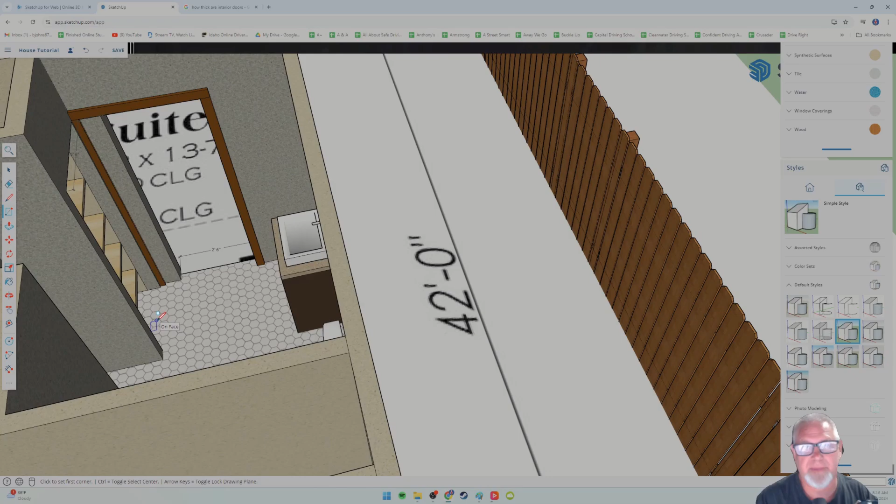I'm having some issues, some challenges, some successes, and that's the whole nature of the beast here. I made an error earlier on a previous video, which I may update with some text or something.

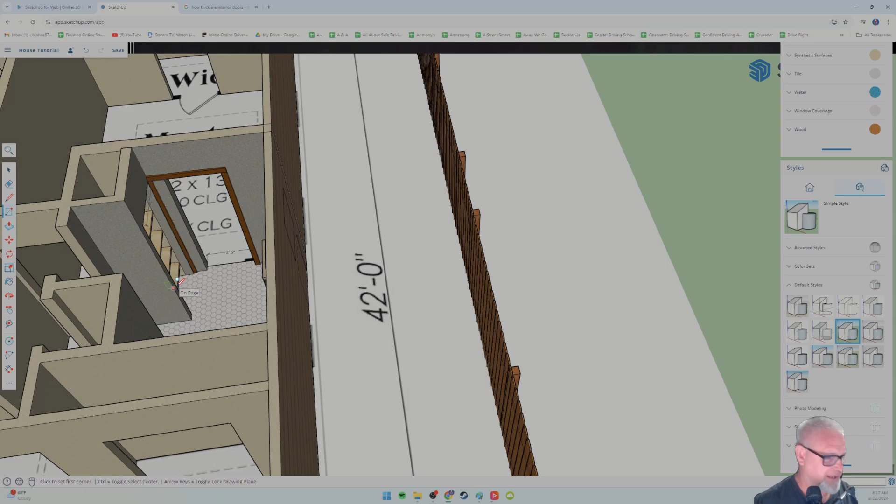3-foot doors are considered handicapped accessible. My house was built that way for a previous owner, so I kind of forget sometimes that the normal house has 2.5-foot doorways. That's normal, that's probably what your doors are. The outside doors are 3 feet, which allows you to get furniture in. But the problem is once you get the furniture in, then you have 2.5-foot doorways. I always thought that was crazy.

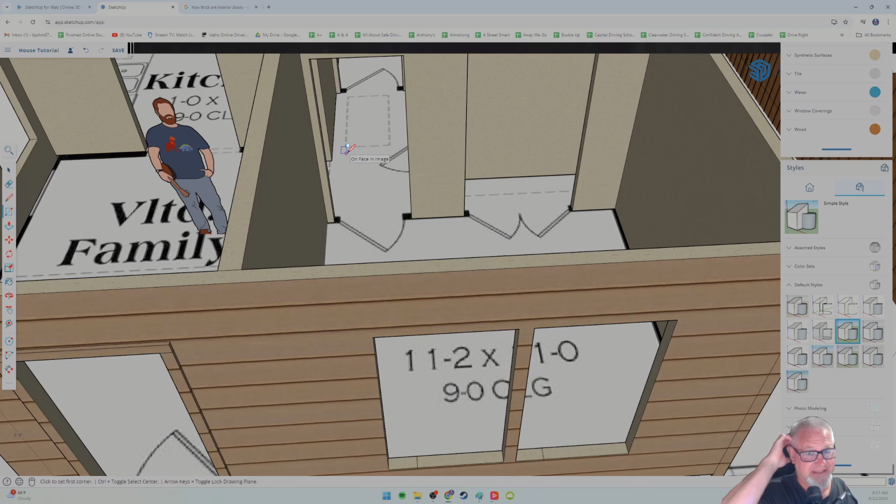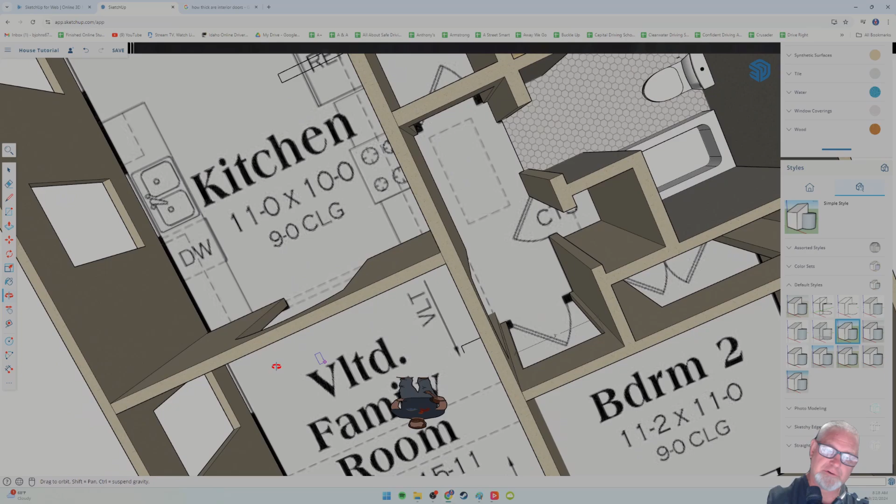So outside, now this is obviously not a requirement, but your outside door should be 3 feet. Inside doors, I've already told you 3 feet. If you have room, great. I'm going to keep my arches at 3 feet because I think that's cool. I could even make them wider, which I think would be cool. Between the kitchen, depends on how much counter space and stuff I need inside there, but a nice bigger arch in here would be really cool. And it's pretty easy to do just by pushing.

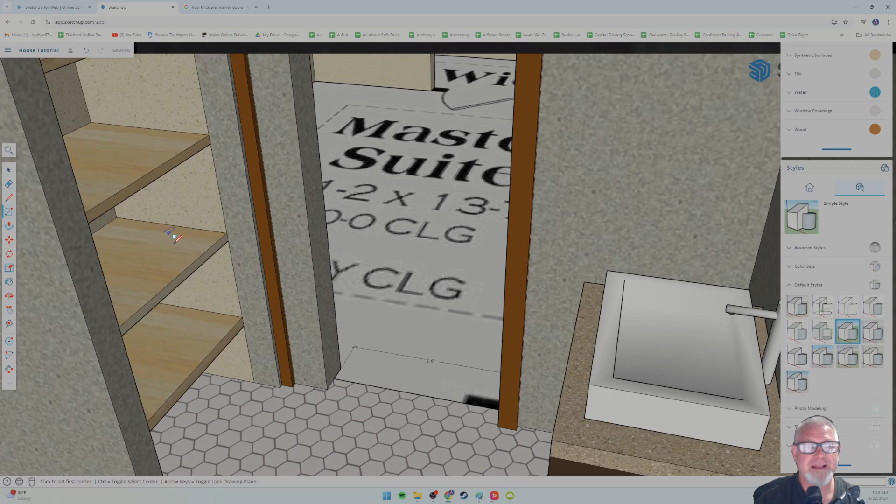So I'm going to jump back into the bathroom as my example because that's the only room that I have pretty much almost done. You do not have to do this. I added some shelving, and I'll be full disclosure, I didn't measure these shelves, didn't measure how far apart they are. I just eyeballed it. So that's not normal for me, but I just didn't want to spend the time, it's just a minor little detail, but I think it does look cool.

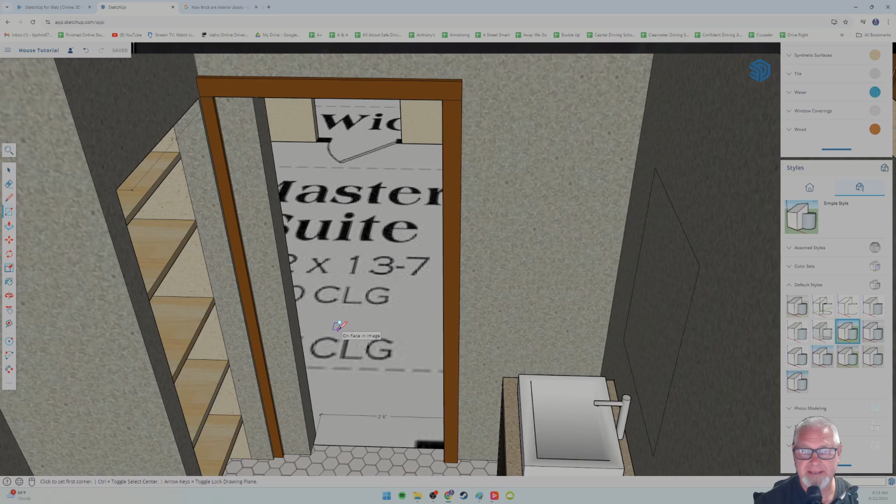And then I realized I don't have room for 3-foot doors in this very small house, so my doors barely fit. I could have moved the whole door over, but I was running into some issues here with the molding. And so that's what this episode is for: windows, doors, and molding. One of the most important things to make your house look cool.

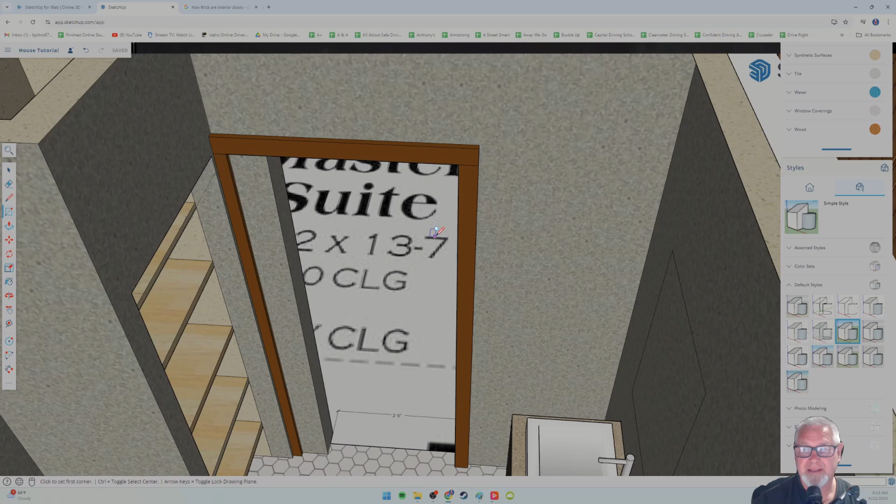So the molding on the inside, these are 1 inch deep by 2 inches wide. Now that's pretty skinny, but this is a small house. Normally I'd go 3 inches, maybe even 4 inches on a nice molding, but this is kind of like a tiny house, so I'm shrinking everything.

Including my doorways. So I have already measured and pulled this wall in, so I have a 2.5-foot doorway, which is great. I just need to fix the molding so it fits.

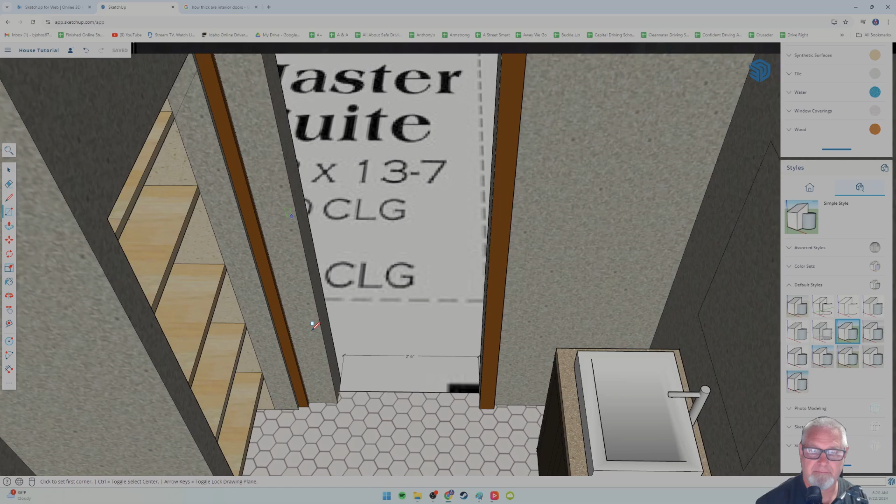On right here. So the way I do that, by the way, is typically I'll just go to the floor, and this is Mr. Johns' tip. I'm going to go out 1 inch, and then I'm going to go over 2 inches. I'm going to go in just to the wall and kind of connect it into a shape, and then click it to make sure it's a separate shape.

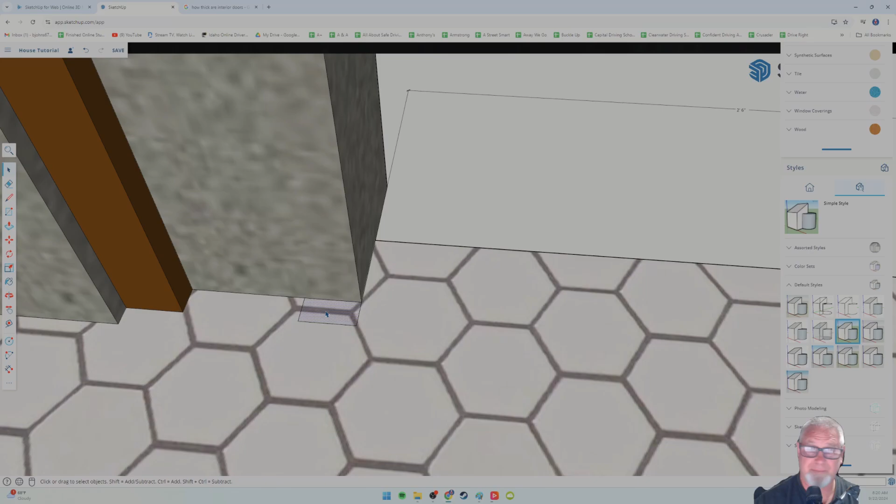For some reason, mine is not filling in anymore, I don't know what I did. I'm not on X-ray mode, but it's not filling in solid to show me that it's a shape. That's not good. But once I know it's a shape, I can just pull it up. And yes, it does take the texture, the paint, the color of the floor, whatever I cut it out of, that's fine.

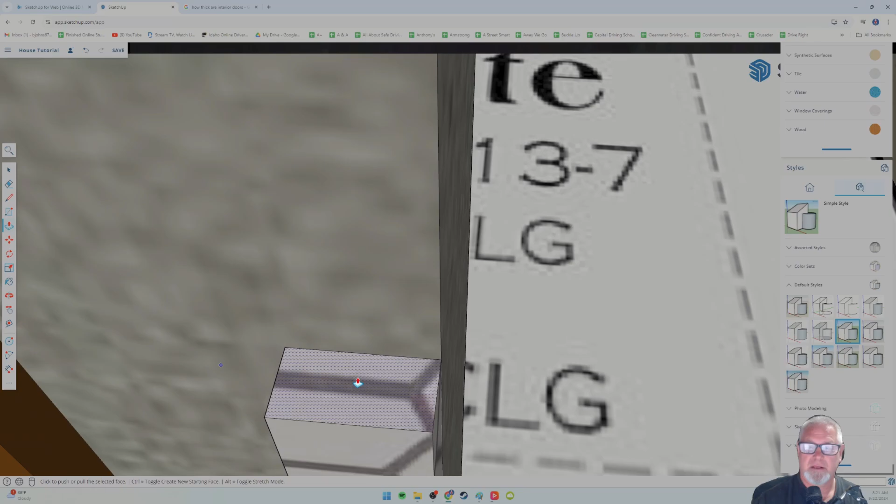So now I am just kind of panning and pulling. I mean, I could measure probably and do it, but I don't want to take the time to do that. So I'm just going to snap it up here. I mean, I could zoom out and probably do it a lot faster in one swift motion and just go until it doesn't go anymore, and that pretty much locks it in place.

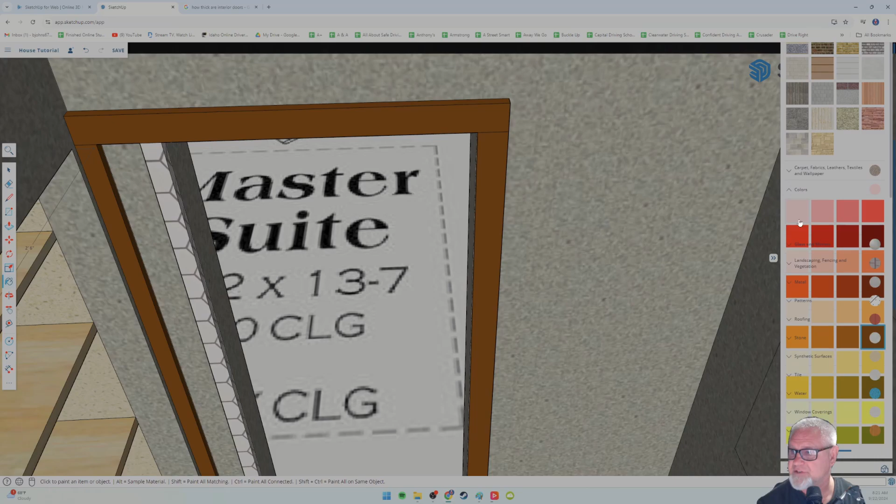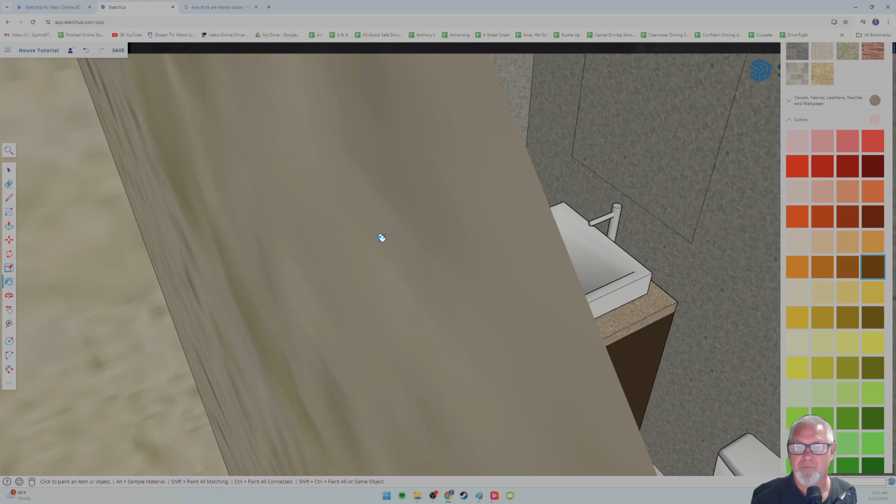And then I have played around with different colors for this, that's not what I want to do. I want paintbrush, so paint bucket, and color. I was using the darkest brown I could find right there. I tried to match the color of the cabinet, but I couldn't find a dark enough color, so I don't think any of these really work. Let me try that one. No, it's worse. I wish there was a dropper tool so you could match a color, that would be a great upgrade. I tried white, then I went brown, so it doesn't matter, you could paint it purple, I don't really care. But your molding has to be painted a color or texture or whatever.

So, and it needs to be colored, here I can see that side right there, it's not colored either. So now, why does that look, did I do 3-inch trim in here? Oh, I did do 3-inch trim.

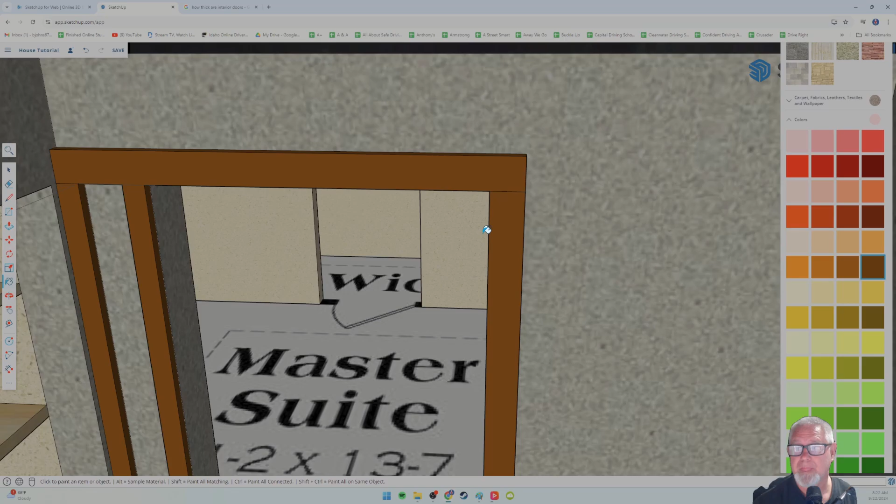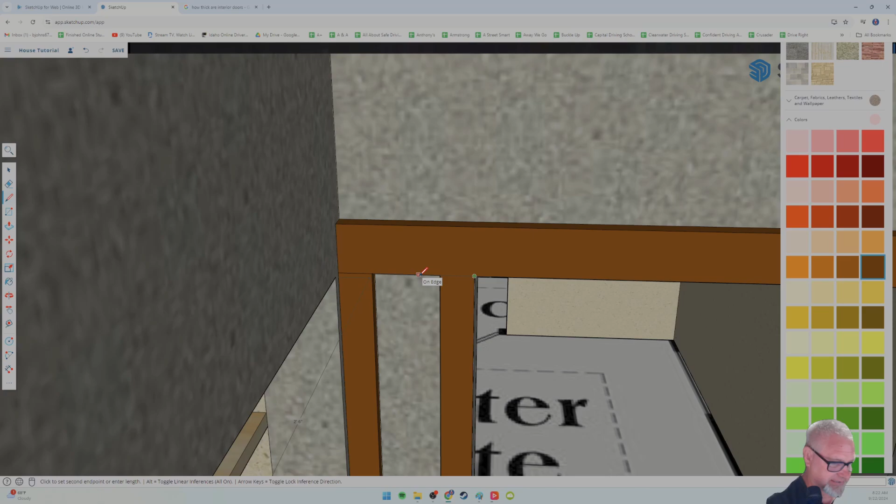Okay, I guess I decided the 2-inch trim looked too cheap, so I went with 3-inch. I forgot, so I need to make this wider. Here's what I'm going to do: I'll click from here over and type in 3 inches. I'm actually happier with that, 3 inches, and go straight up.

Now that's where I need to— the walls are just in the way constantly in here. Seriously, tight quarters, be careful how much you zoom in. I'm just trying to get to that, so delicate, just be delicate and don't get frustrated.

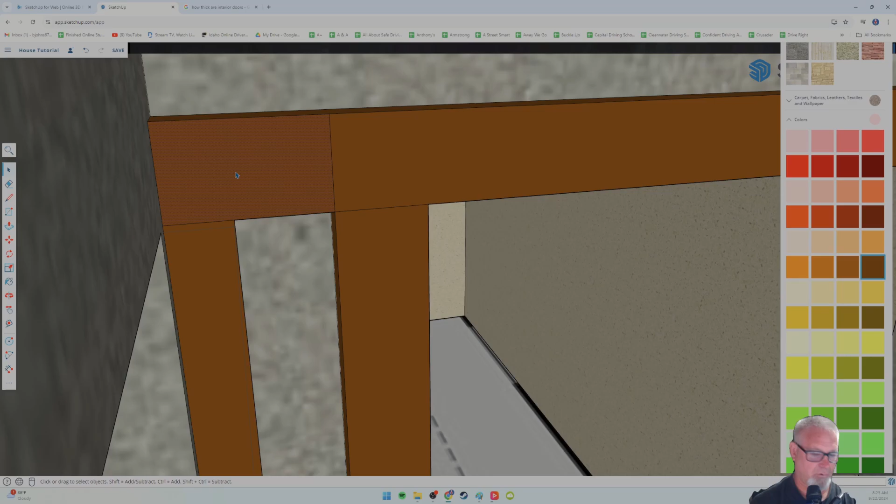I'm going to go over until it snaps to that line. Now I'm 3 inches. Now I can also delete this old one. Might take me a second, because now you don't have to do this. Obviously, I'm just fixing this.

Okay, you get my point, I think. So, did I delete part of the wall? I did. Don't delete the wall. Just make sure you know what you're selecting.

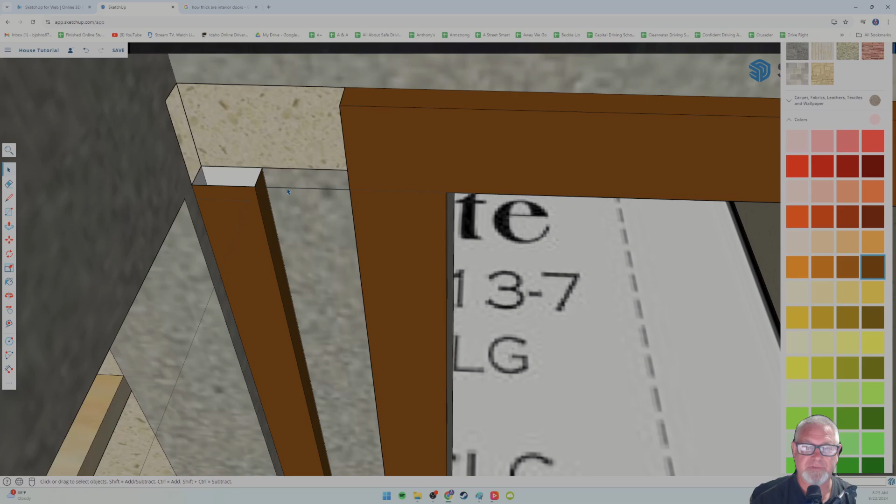So, okay, I don't really need to do this on video. You get the point—I wanted to show you how to make your trim, so there's a nice piece of trim around the doorway. I normally make bigger houses; this is my first small house. I've done a tiny house, but that was— seriously, where am I?

Yeah, I'm going to have to just change your view, go up, zoom out. What I'm doing is zooming out, just getting unstuck.

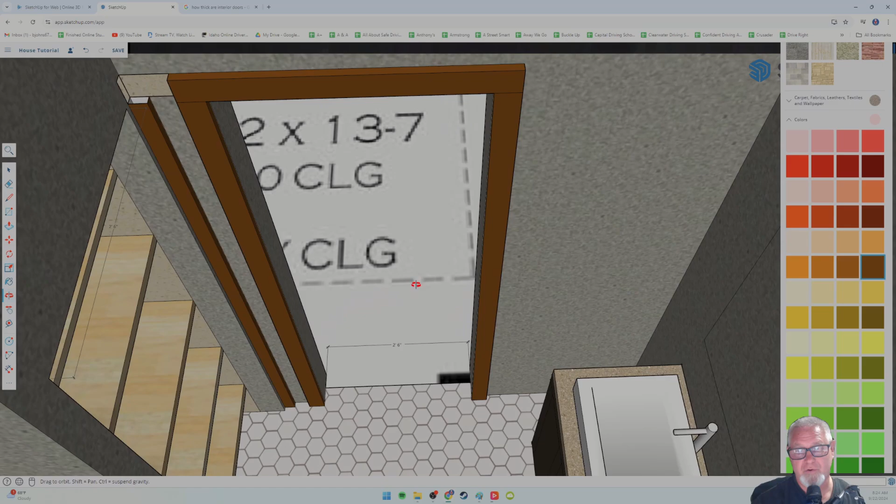So what I want to show you is a door. How would Mr. Johns do a door? I could download it and scale it—that's true. There's a lot of doors in this house, so you could, but I'm going to try it this way first and then make a decision.

Doorway should be right in the middle. So what I'm going to do is, let's see, the best way to do this—I'm just going to click and drag and type in 1 3/8. 1 3/8 inches. Let's see if it takes that.

I think it— no, it didn't know what I was talking about. You can see why I like millimeters so much better. 1 3/8— if I just type in 1 inch, no, it's not going to know that. How do I type in 1 3/8 of an inch? Well, that's the— okay, I know there's a way, come on now. Let's just make it easy and type in 2 inches. Got to figure that out.

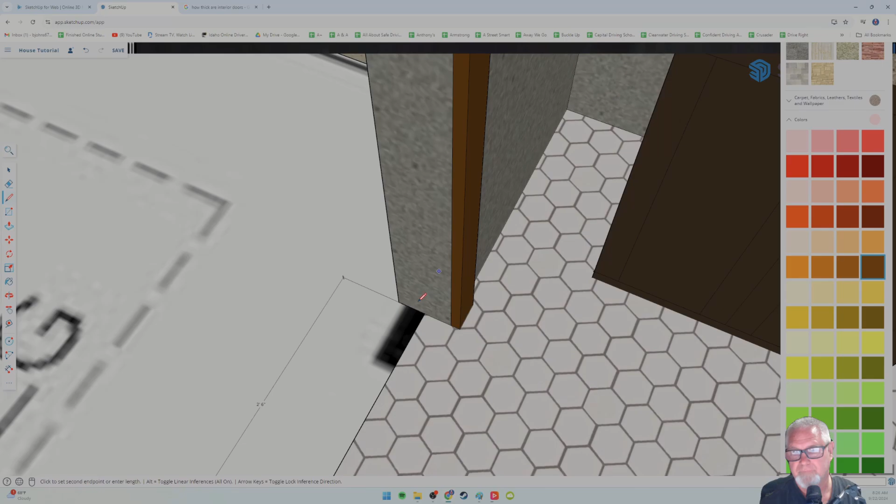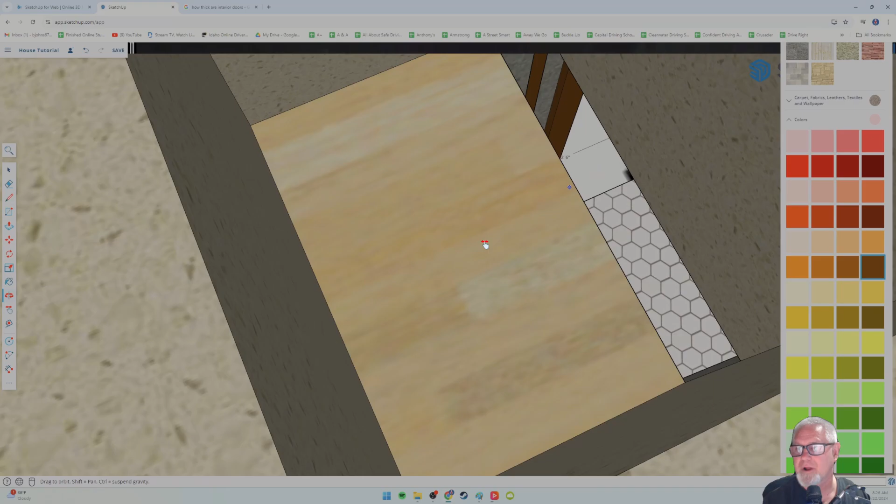So we've got these— boy, it's not letting me see my lines. Oh yes, yeah, I get it. I do understand, the frustration is the same for me. So look at that, I can't even find where I am. I'm up on a shelf. Okay, let's just get under control.

I'm going to zoom in. Since a door is not on the ground, right? It needs to swing. I'm going to go up 1 inch. Okay, now that I'm zoomed in, I'm pretty much under control.

I'm going to go this way 1 inch. I'm going to go this way 1 inch. Oh, come on—that way 1 inch. Okay, now I'm going to delete.

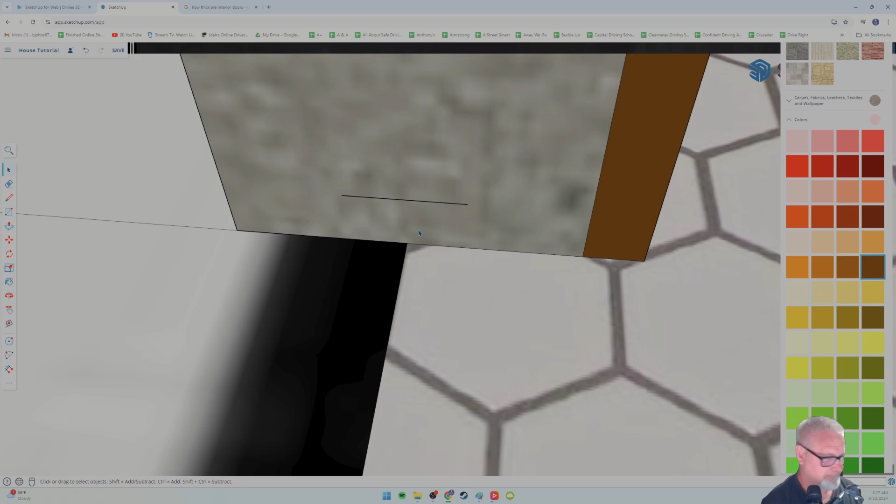And you might think this is a lot more work than downloading a door and sizing it and rotating it. Maybe, but I'm trying to save— if we have, I don't even know how many doors in this house, if we have 8 doors and I download them all, that's going to lag my system a little bit. I think I can just make a door once, and maybe I can copy and paste it.

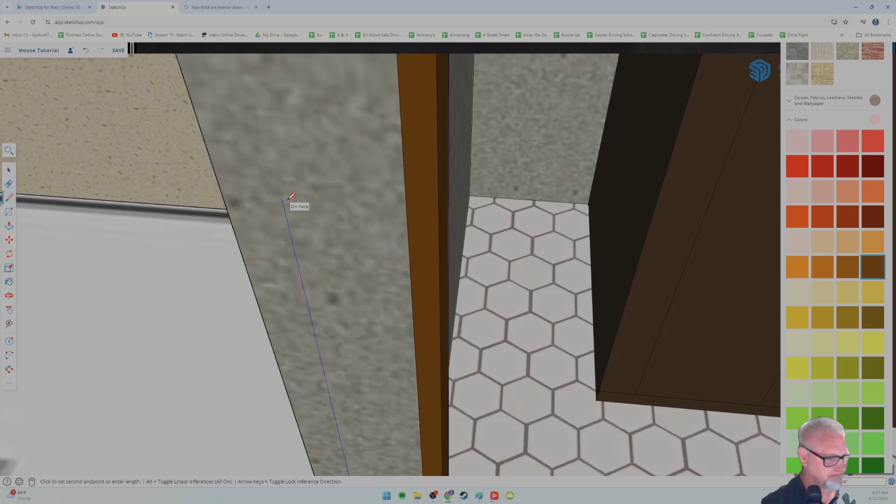That's my goal, so I'm going to go up blue, and I should measure it. If I'm going to copy and paste it, it doesn't matter how tall it is—it just needs to be on blue, and it needs to be not quite touching the top. So I just need it to be— see if I can get a better view of, oh come on. I'm going to go ahead and click and then redo my view just a little bit. There we go. I probably should be from the top an inch as well.

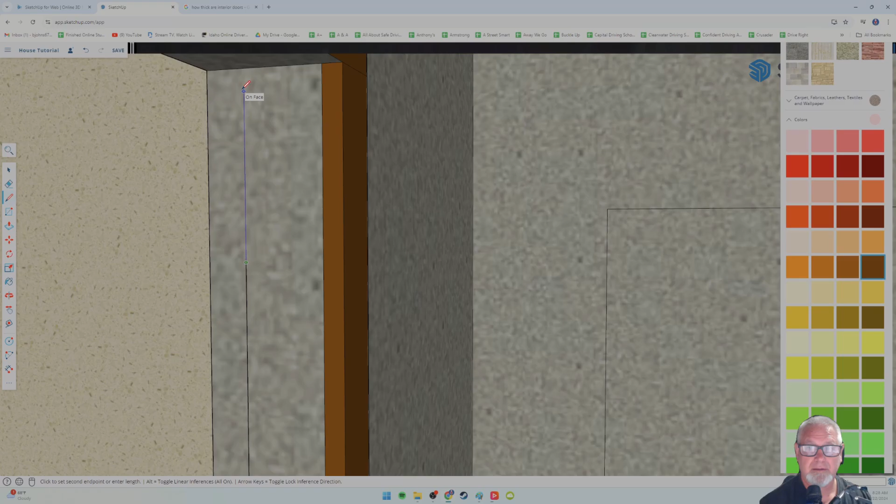I'm not going to care too much on this one. So I'm going to go over 2 inches, enter, and then down. You can see what I'm doing, I am drawing a rectangle on the wall in purple crayon. That's what I'm doing.

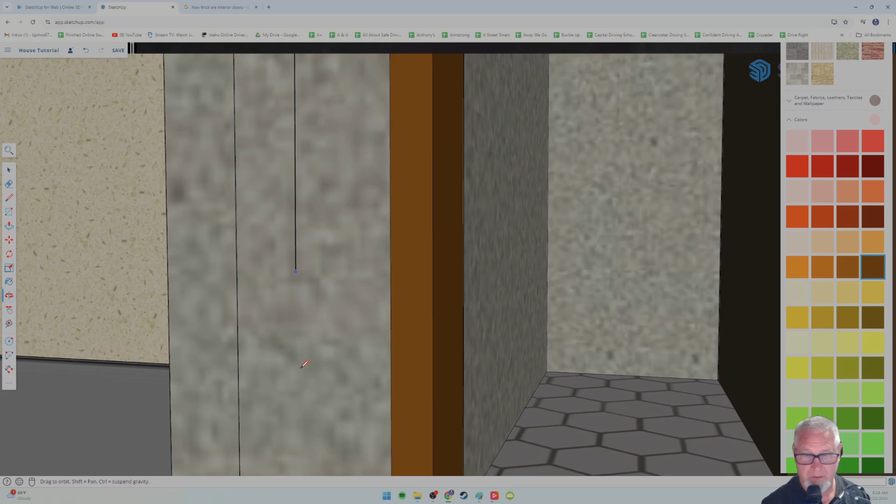Don't tell Mom, okay, I'm just going down. Now I should be able to just click here. Okay, bing bing, that is a shape. Okay boop, now it's a solid shape. I'm going to pull it across.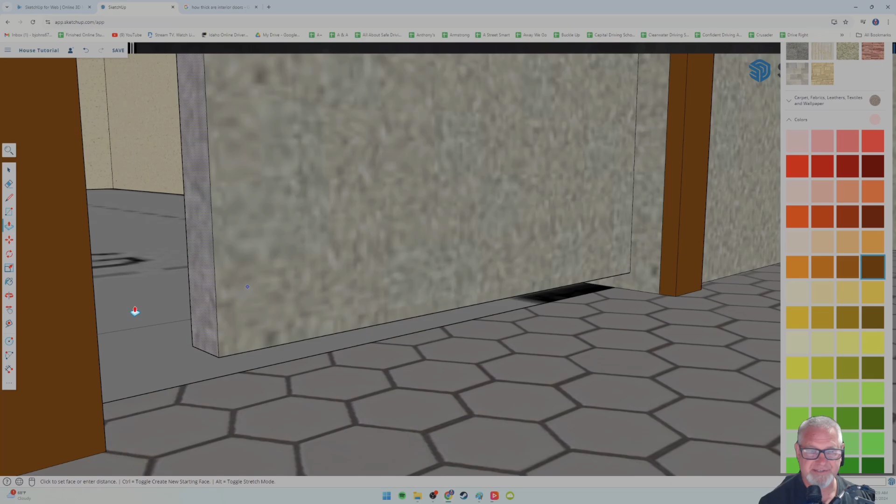It changed my view just a little bit. And I guess technically it wouldn't be touching the walls either, I mean there's a hinge on one side. But we're not going to be so picky. I mean Mr. Johns is crazy, but I'm not that crazy. I'm going to keep one side not touching. I mean, we'll just... no, you shouldn't be able to see in.

I'm gonna go ahead and just pull it all the way across. Okay, I like the fact that there's a gap on the bottom, there's a gap on the top. That's pretty much legit.

Although the one at the top is... where am I? Let's get over there again. Wow, okay, the one at the top is usually not - I mean it kind of, I'm looking at my door. The bottom, yes, the top one though, however, almost goes snug.

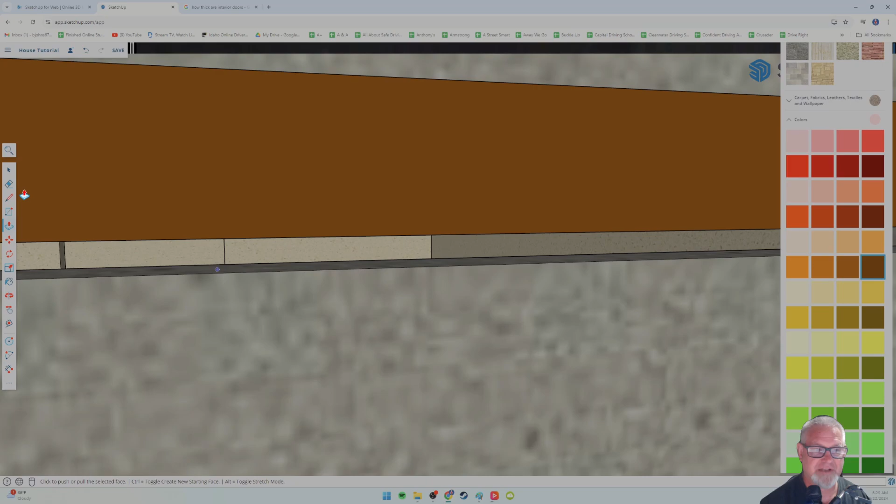So I'm going to just kind of copy that, so no particular rule here. I'm just going to go up so it moves, so it would open. Cool, and then at the bottom, it's good.

So don't zoom out too much, don't leave the bathroom - that's the mistake I keep making, and it just puts me way back. It's craziness. All right, this is a door.

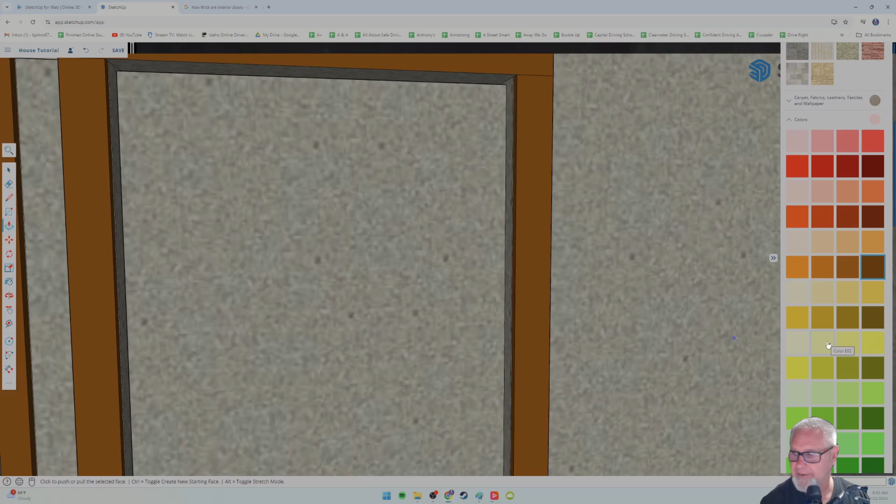It's usually wood grained, it could be white. I'm looking at mine in my room, mine's white, but it could be anything. I mean, don't go ugly - well, do what you want, right? Do what you want. I'm going to say my doors, that looks like flooring, so that's not good.

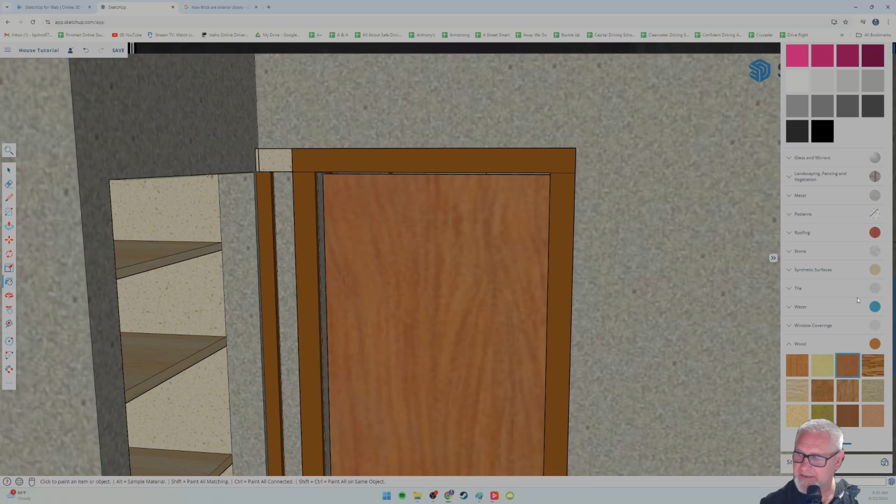That looks weird, it is wood, but yikes, not loving it, not loving it. Most, I'm going to say most doors are white on the inside of a house, but man, that is white.

So what about an off-white? Come on, zoom back in. Man, it puts me like 12 feet back when I do that. Can I do like a gray, like an off-white? Okay, that's besides the point, so I just wanted to show you, is that what it's doing? That's gray, okay, there we go.

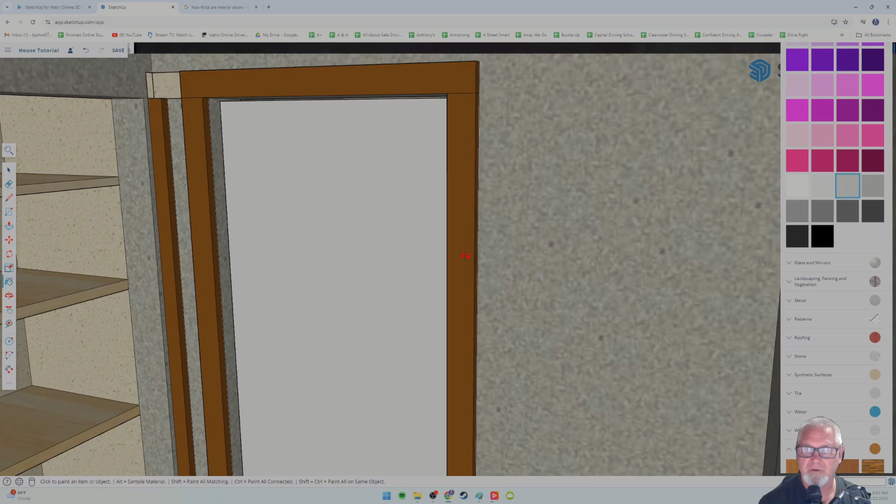That's better, it's not so obnoxious. Just something not so obnoxious. I wanted kind of an off-white, and that looks pretty good.

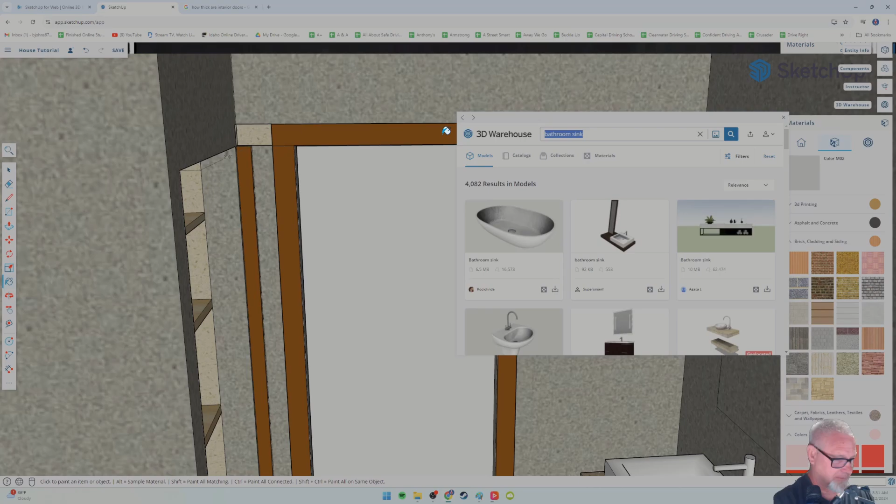So, okay, doorknobs are very tricky. So that's another thing, it's kind of like a toilet in that way. So we're going to download a doorknob, a doorknob, and we just need a basic whatever. You pick.

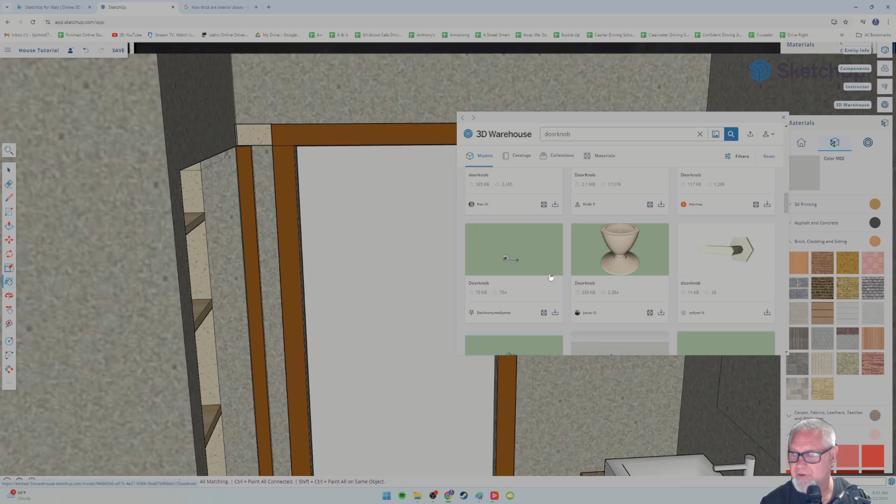Doorknob, black doorknob. You know, I want it to be kind of an old-fashioned doorknob, that's like a school doorknob. That's fairly normal looking too. I don't really want like brass. There's an old-fashioned one, that's a knob. I need a doorknob, not a knob.

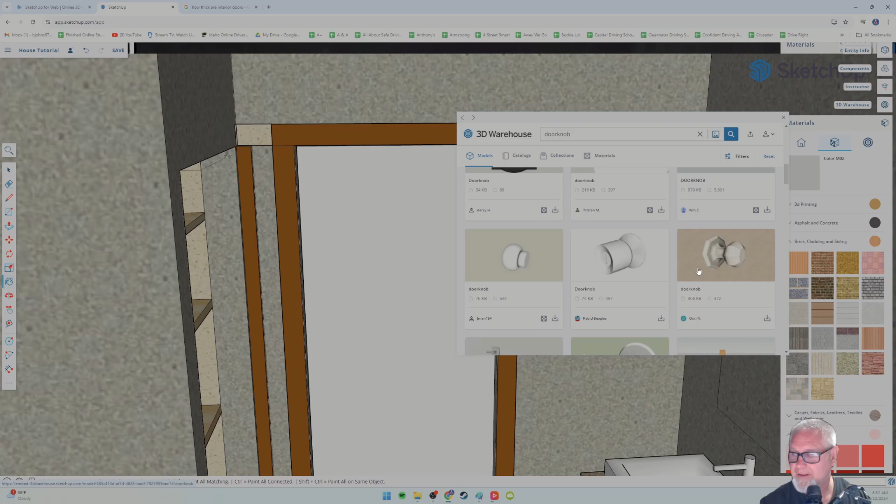Your choice, you know. So I'm just, the further I go down the weirder they get, I think. But it would be kind of cool to have something unique, it's your chance to be kind of creative. That one's kind of cool, let's try that and see how it looks.

And let's hope it doesn't come in - it came in sideways. Oh, it's also white, I don't love that. And I also don't want to rotate it. I wish there was a way to honestly just click a button and have it come in.

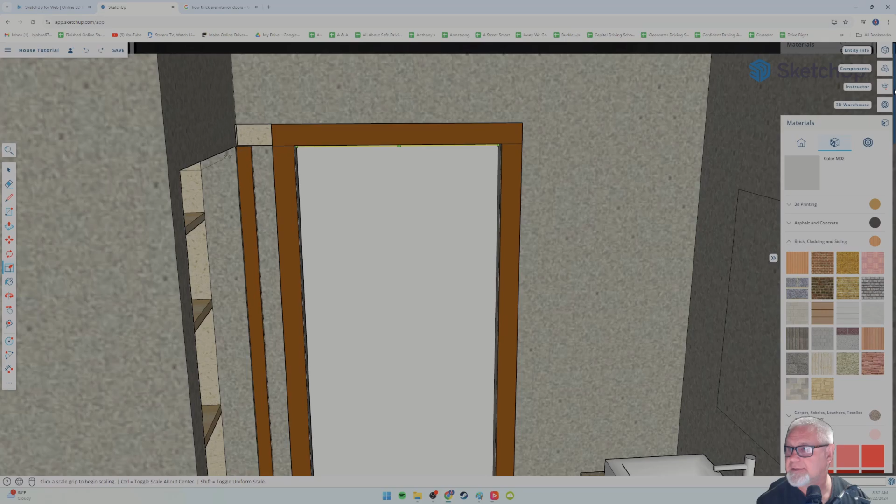No. Okay, so let's try this one, it has a key. You could lock it, that's kind of weird, but I was hoping to find one that actually comes in at the right, at the right.

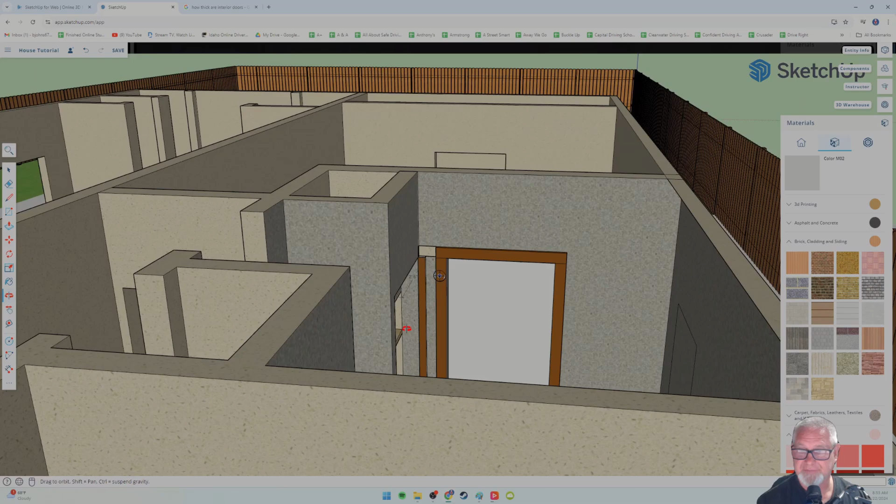Holy guacamole dude, seriously, I got the doorknob in my hand, but so it doesn't matter what side the doorknob is on. I don't know, they're usually on the right, but if you're on the other side, it's on the left, right? So it doesn't really matter.

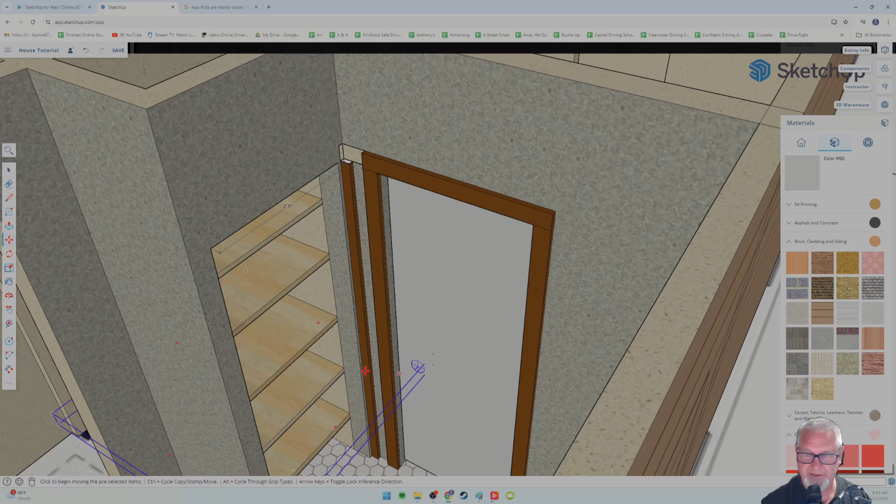I'm just going to put it here, and it looks like I'm going to have to pull it out unless it went on the other side. Of course, both sides are going to need one. Let's see if I can - what is that? Why is it? It looks like a big... like it's a group.

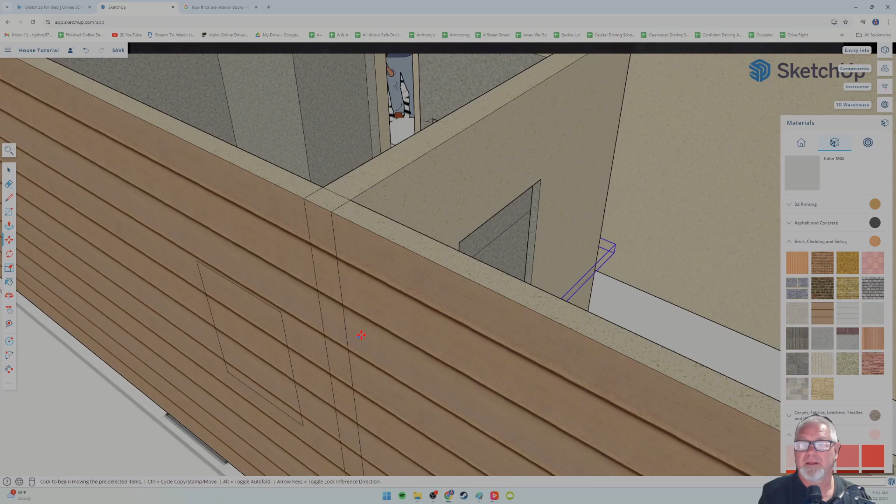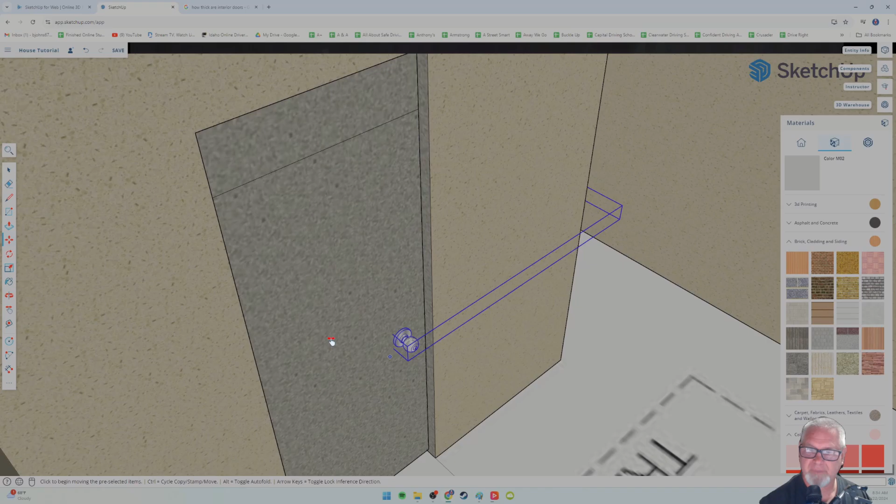I'm going to see if I can pull it straight out. Oh, it's the other way around, so let's put it on the other side to start with. Rotate, okay, here we go. Why it's a big group way over there, I don't know, that's weird. Makes me wonder if it's a group, that means there's something else over there. Just knowing SketchUp, I'm going to pull this out until it touches and then let go, and double check that we're actually touching the door. We are. Okay, that's weird on this side though.

I didn't paint that. What color did I decide to go with? Don't forget, you've got two sides. I went with off-white gray, I went with that one. Let's paint that. Okay cool. Why is that? I don't know.

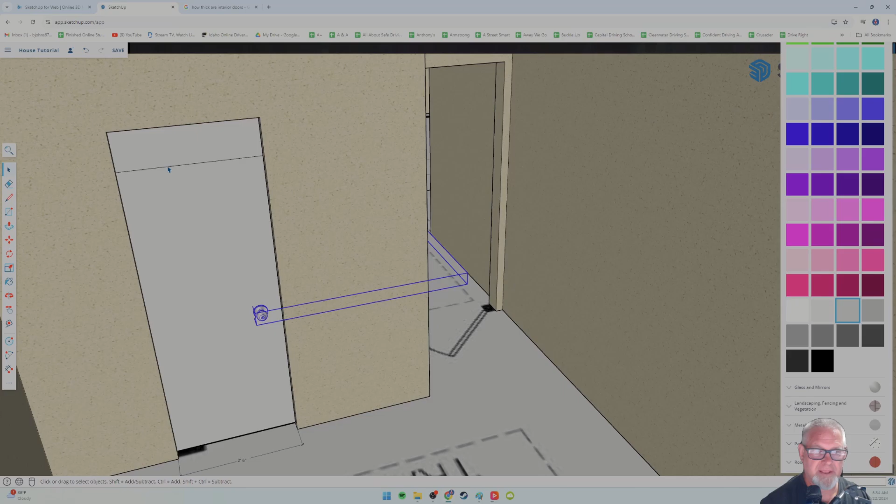That's weird, so little things, just clean up little things as you go. So that looks pretty cool.

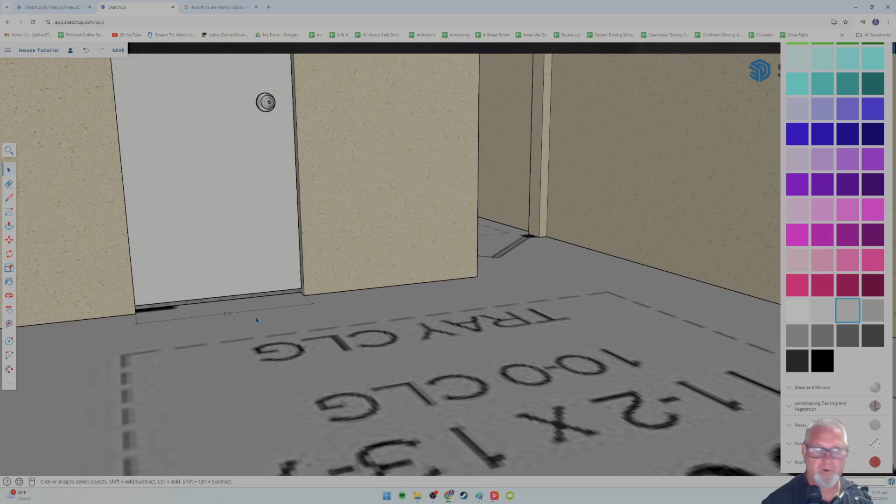There's no texture to that door. What makes it look cool, what makes it look good, we could have been lazy. We could have just painted this rectangle brown and put a doorknob on it and said it's a door. But what we did is we hung the door. I didn't make you do hinges. If this was a college class or a high school class, yes, we would have totally done that. But what we have is a door that's actually hanging off the floor.

It's a different color, I don't love the gray, I may change that still. And it doesn't quite touch the floor, it's almost, but there's a crack. It's all good, and it has a doorknob. So I will need to copy that and rotate it, which I'm not going to do right now.

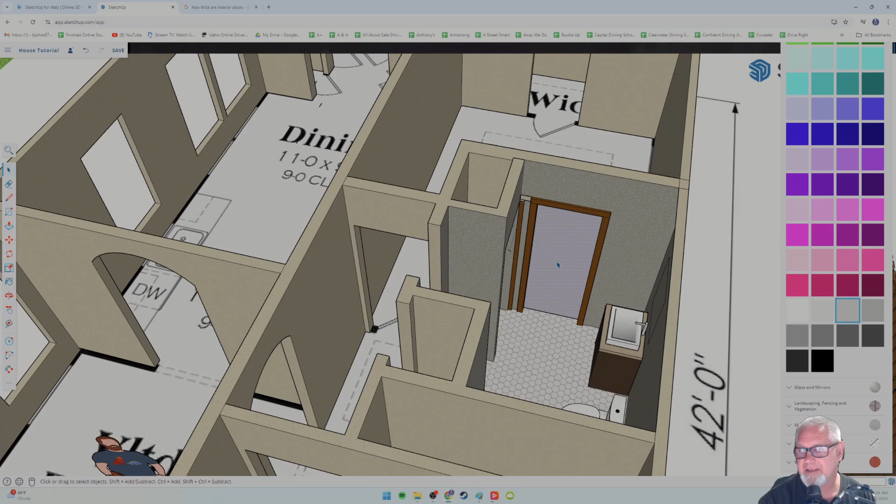Okay, I should have made a bigger house. Over here, so the doorknob will be right here, and I'll do the same thing for a door here and the whole house. I was going to try to copy and paste this, and maybe I will. If I can put the doorknob on both sides, and if I can select just the door and the doorknobs, make it a group, I can pretty much just drag, and I should be able to just put it in all the doors. I'll have to rotate the ones that are facing.

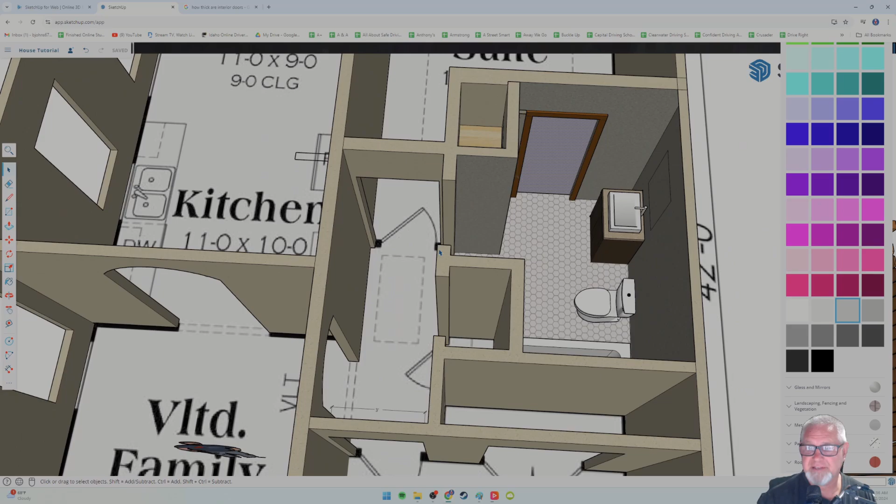Are any of them facing the other way? Yeah, the outside bathroom door is facing that way, but most of the doors are facing left and right. So I've got a couple small ones in here, these are really small, I'm going to have to custom make those ones.

So you're going to spend some time making doors, however you want to do it. You guys are ninth graders, this is for my ninth grade class.

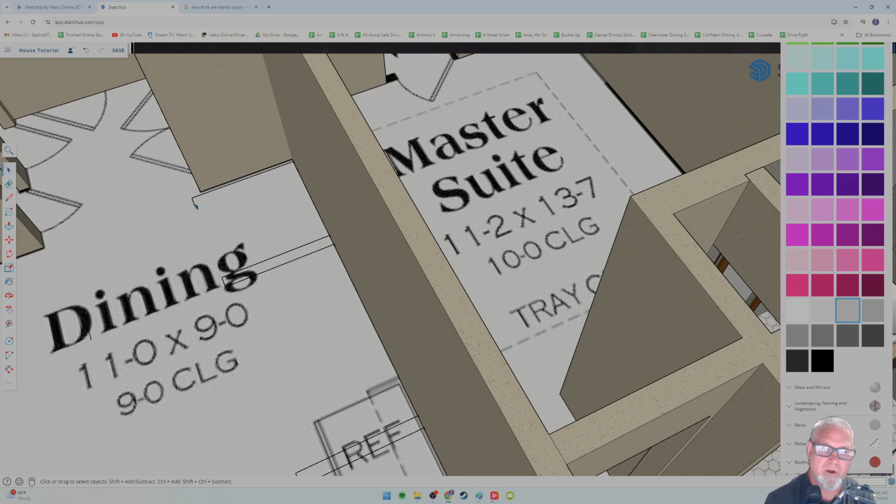I'm going to, what is that? Stuff just shows up sometimes. As I'm... what are you? Why are you here? How did you show up? Whoa, what is all that about? There's some weird lines that I don't remember. But as I push... I don't know, I'm going to clean those up. I don't know, as I was designing, something got moved. I'm going to let you choose.

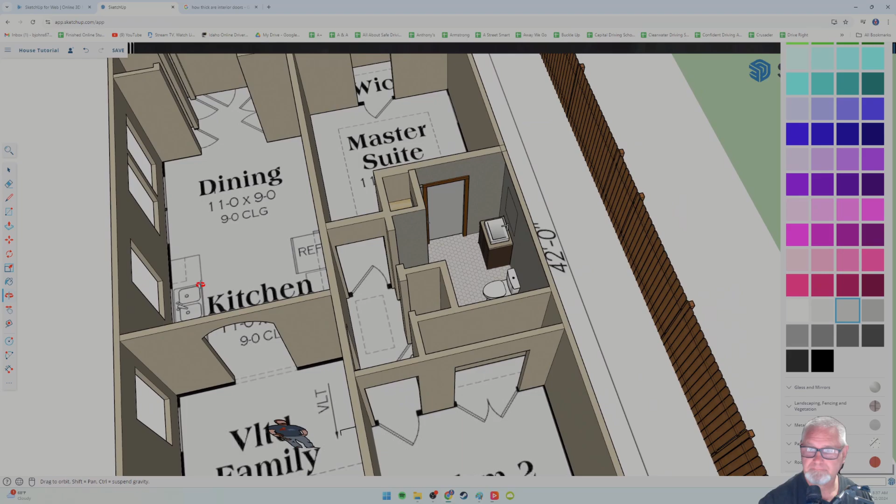My point here is you download the house, obviously, by hand, you make what you can by hand. You download what you have to keep it from lagging.

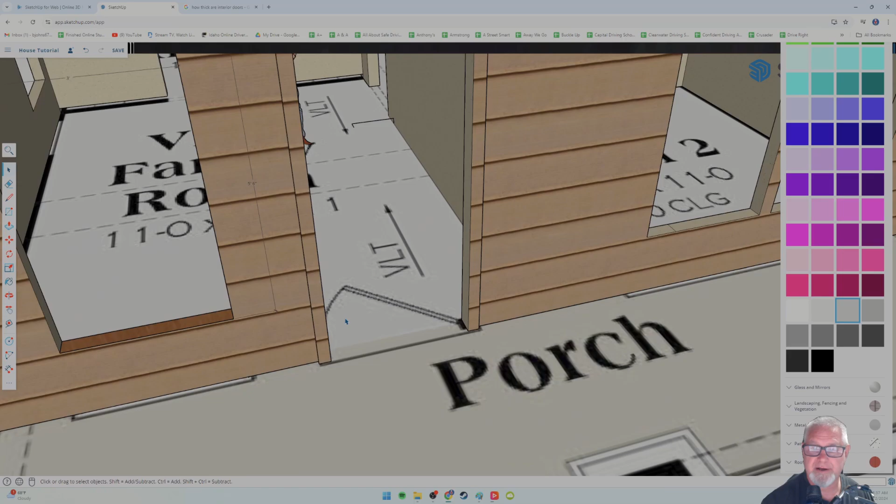So last thing I'm going to show you on this video are windows, and it's very similar. By the way, I was working on the door here and doing my 3-inch molding around the door, and I'll do the same thing. I may even download a nice looking outside door, I think that's a nice touch.

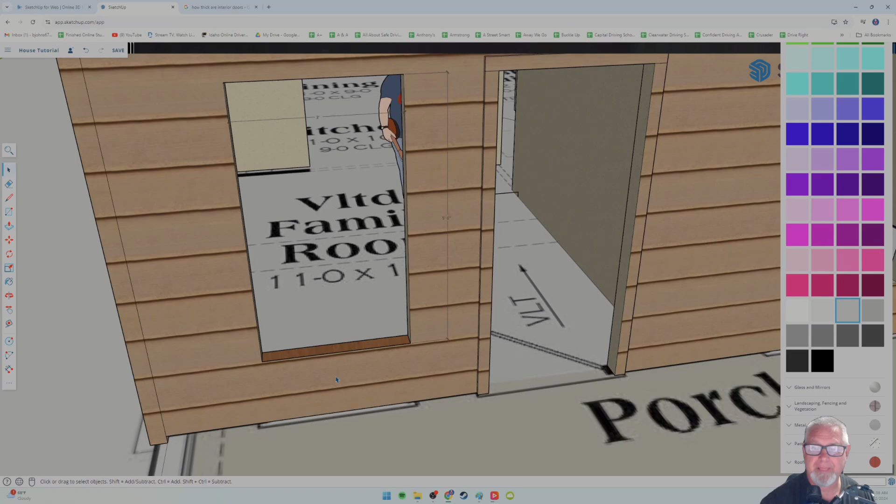So for the window, I don't even know if I need to demonstrate because we're going to put 3-inch molding around it. What I like to do, people have asked about this: how do you paint it glass when it's nothing, since this is just a hole now? I like to take a pencil tool and go diagonally, corner to corner. It will fill it in as a solid thing, and then delete the line that you used.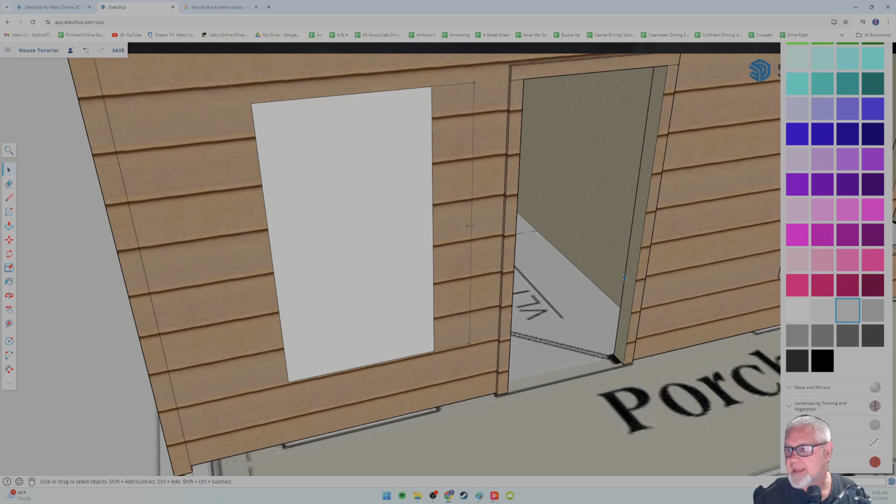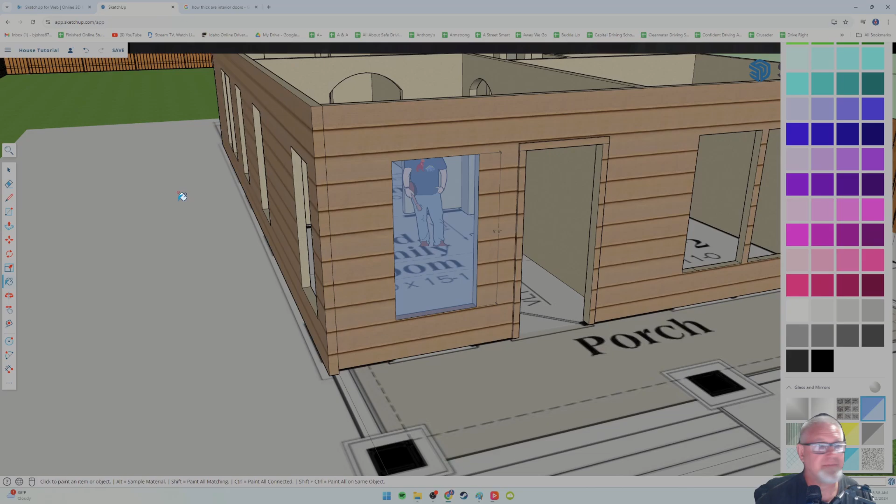I'm going to delete the 3-0, make sure you... yep, there we go. And now I can go to glass and mirrors, and I can paint that as glass. So that with molding around it is a window. I mean, it's not even worth downloading a window and resizing and rotating and all that work when we can just make a nice looking window by doing just that. Now, having said that, I think I need to remind you that what we're doing is copying an actual floor plan.

So we should try to make it look as much like this exterior as possible, and that'll be the last thing we spend time doing. But don't get lost, always refer back. Notice my trim here is white. I don't have any interior pictures, so I could do brown molding, but out here the molding is definitely white. I'm going to try to copy it. Now those windows are pretty fancy, but I can do it. I can make it look just like that, and that's my plan.

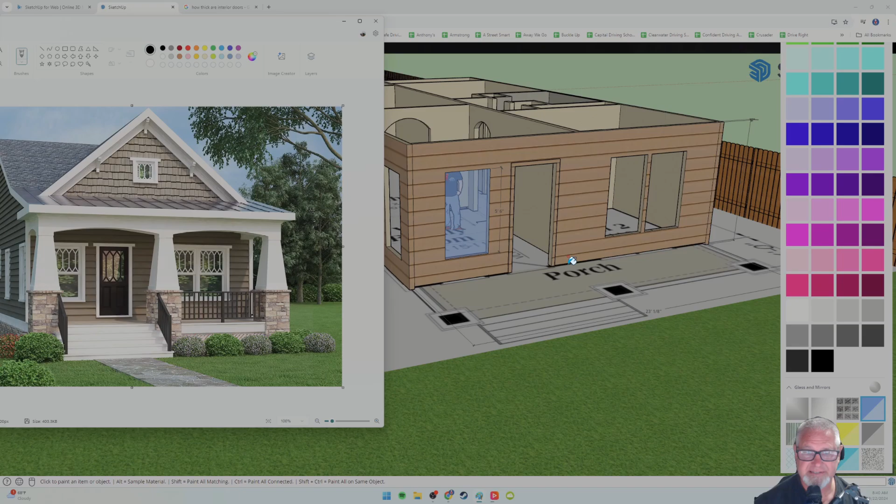I found an exterior color that's about as close as I can find in SketchUp, but it's kind of tan, not quite tan, and I can't custom paint it. Another thing SketchUp Professional probably has that this free version doesn't is custom painting - you can either just paint or use what they have as far as siding. This is pretty close, so I think it's possible. Got a long ways to go, but it's a fun journey.

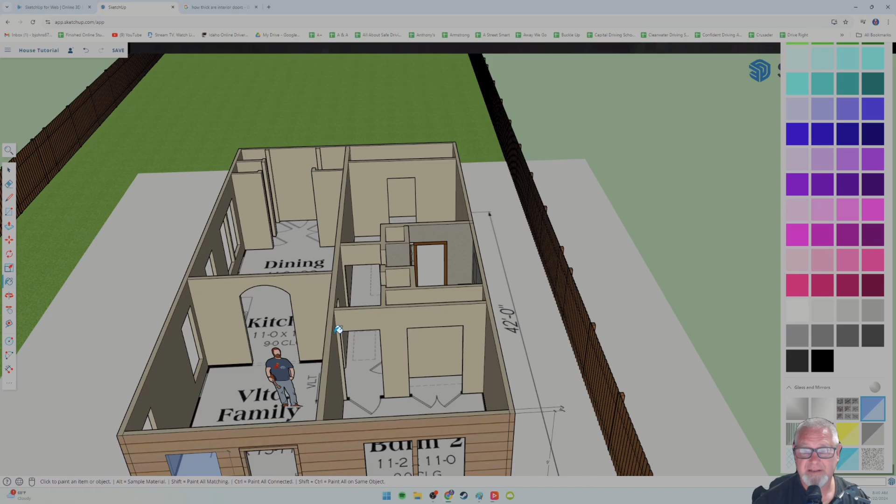This particular step is lots of molding - there's lots of molding. It's going to take some time just to do the molding, the doors, and the windows. That's going to be a couple days, I would say, at least, just for the doors, the windows, and the molding. But we're making progress. I'm thinking it looks pretty cool so far. Can't wait to see how you're doing.

Wait, before I go, I want to show you something. You need to add a mirror to your bathroom. And making the mirror frame made me realize there's a quicker way to do the window molding. So let me show you. If I can show you a trick that's going to be faster, I'm definitely going to do it.

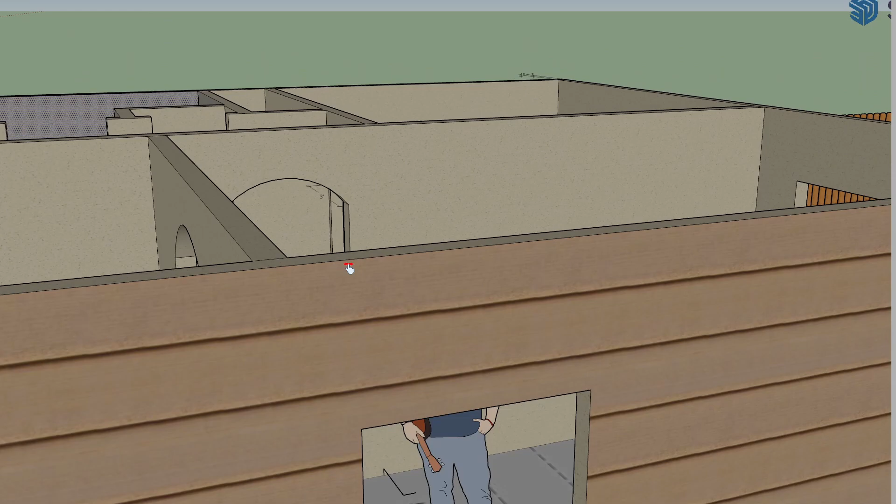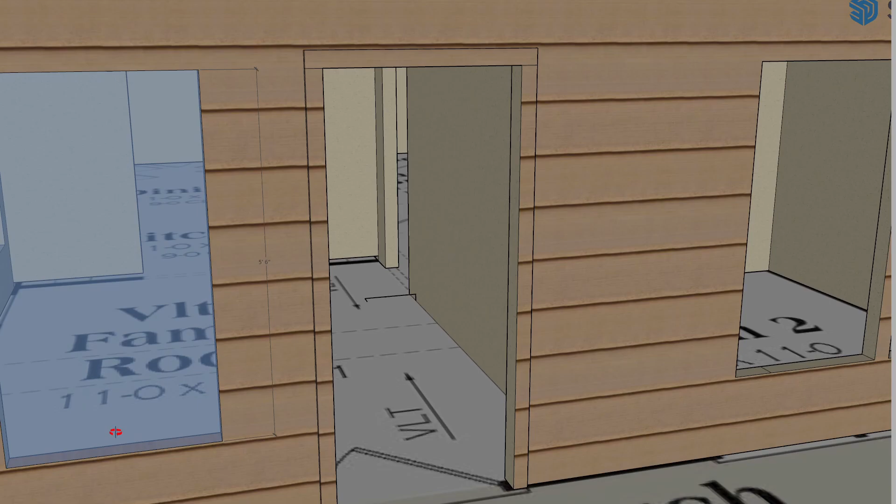So we have a window - any window. This is the one I'm doing next, so I might as well do this one first, don't know why, but it is. If I click on the offset tool and click inside this hole, let's make sure we select it first. Offset tool, click - watch this, watch this, watch this. And there we go, I see it. See how it's... I know this is hollow.

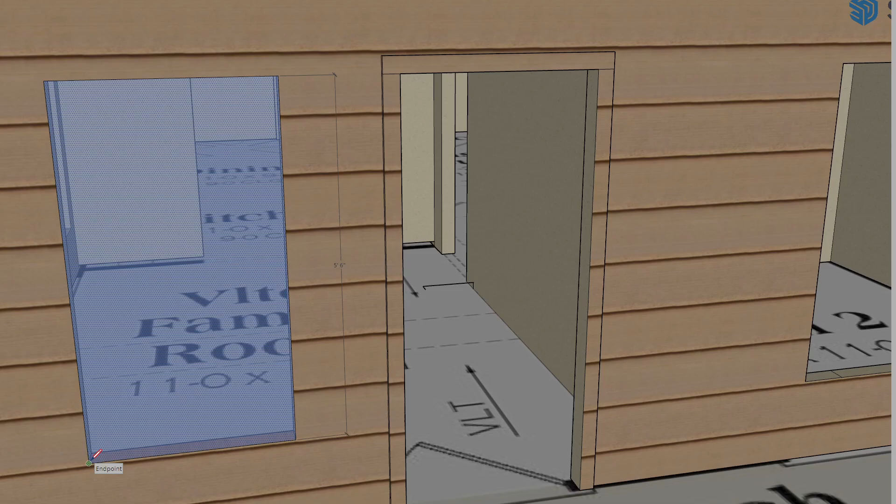It may be easier to show you this way. Let's just say I was getting ready to do the window again and went across, made it. Oh, it's already solid, probably. So let me paint it something other than glass, just to make it more visually easy to see. So offset tool, click - this is how you make one.

Click and then drag - this is how we make a perfect shape inside of a shape, right? But guess what, it'll go on the outside too, right? That's pretty cool. However, we need 3-inch molding. So what we want to do is just draw a pencil starting here or anywhere, going out or up, and type in 3 inches. Now we have a guideline, right?

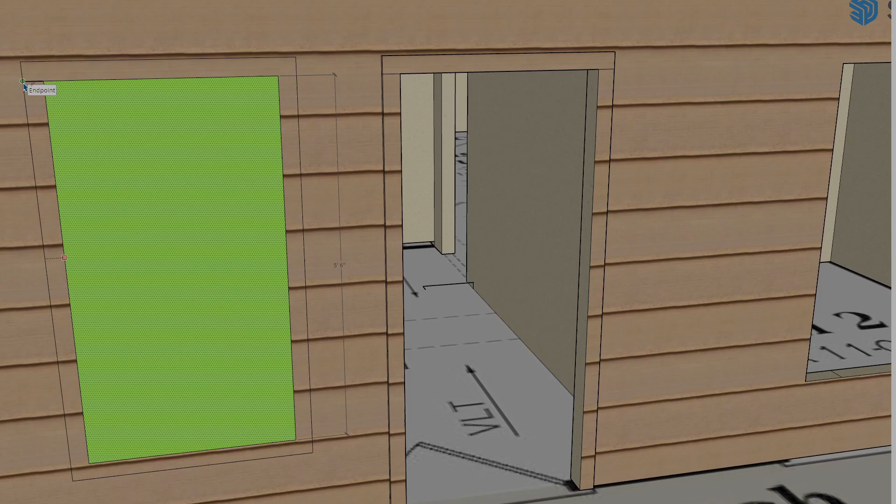So if I were to do the offset tool now, click, drag - that does not look like it's right in the middle. Maybe I have to select it again, select that shape. Okay, let's see, click - yeah, there we go. And drag - come on, come on now. I didn't click, let me try again. Click, drag, okay, so I'm going to move my mouse until it's right on that 3-inch line and click. So what I just did is made a 3-inch molding.

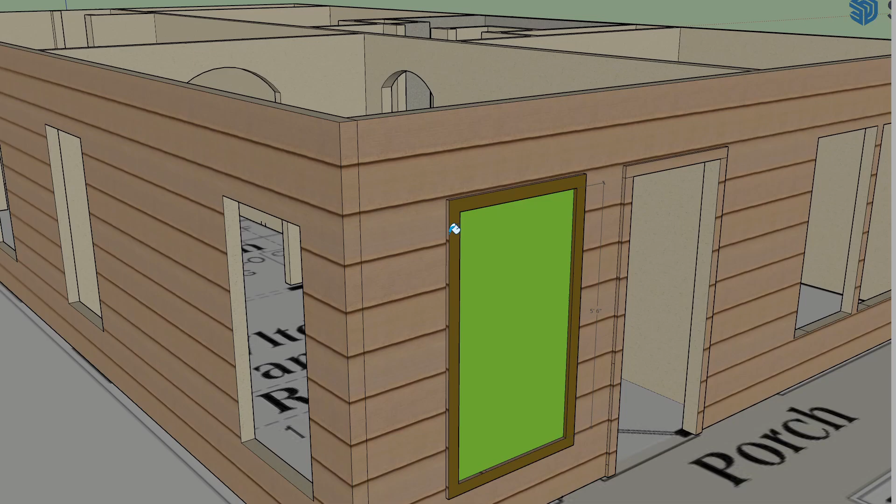All the way around, watch this - highlight it, push pull, drag it, pull out, type in 1 inch, enter. I'm done. All I have to do is paint it now, whatever color that is, right? See how fast that was? So you were worried about the molding taking so long, especially the way I did it over the door. Now you can't do it over a door because there's no bottom, right? So there may be a way to trick it, but I just custom make the door ones.

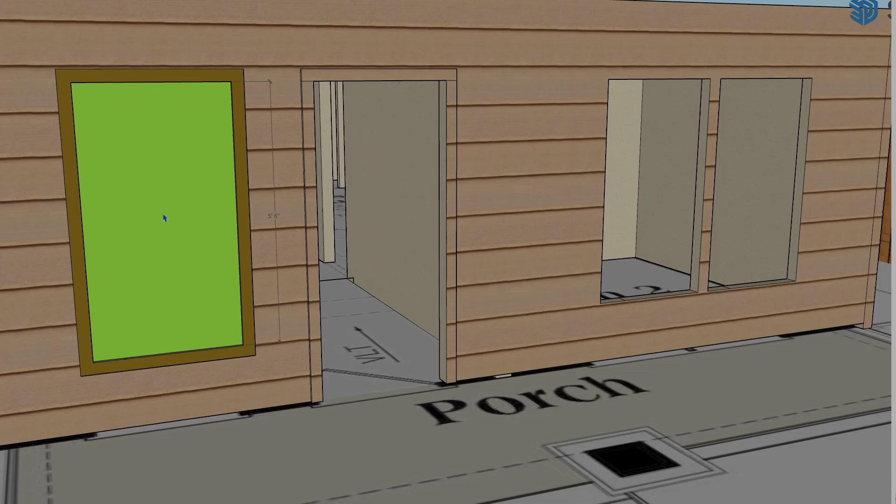If you want to play around with the offset tool with the doors, maybe you can teach me something, but I at least wanted to show you how easy that is around the windows with the offset tool. So keep at it.